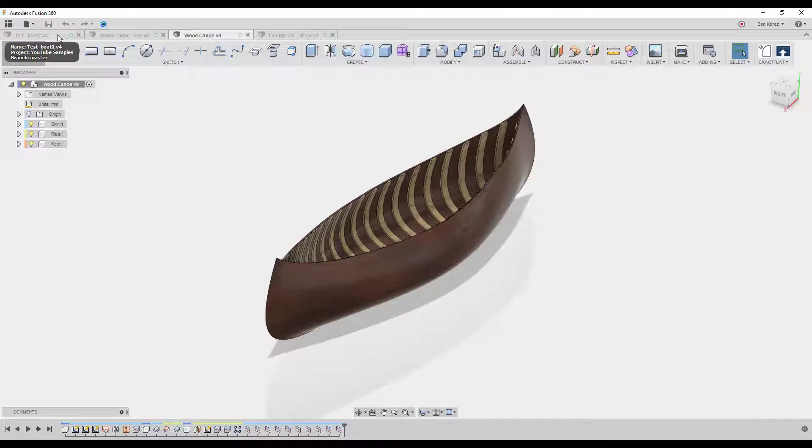So if we're starting now, just a second, I have an issue with my mouse here. It's kind of teasing me, so let's fix it.

Okay, so let's go into this wooden boat that I've created in the last two videos. The way I started, the beginning was okay. If we're talking about the sketching and everything, it was okay up till this point. Let's just see, let's find it. It was here. Up to this point, basically, it was okay.

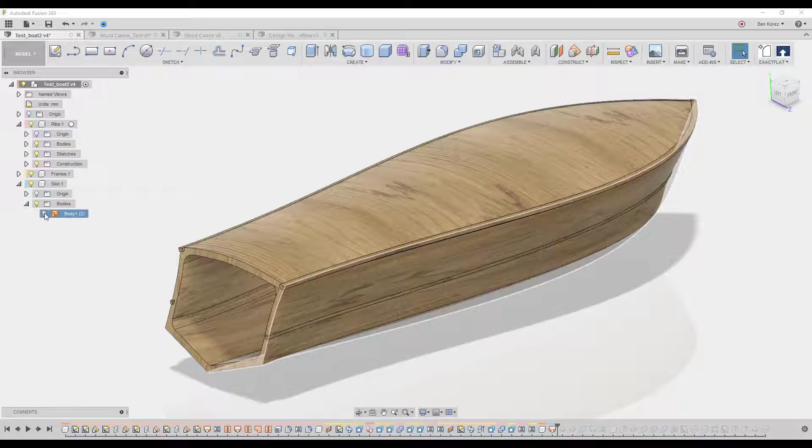But then I started working from the inside out. I started first working on the ribs, and then I moved to working on the skin area. And this is where things started to not work 100% as I wanted to. But I managed to fix it, and I also showed you exactly what to do and what not to do.

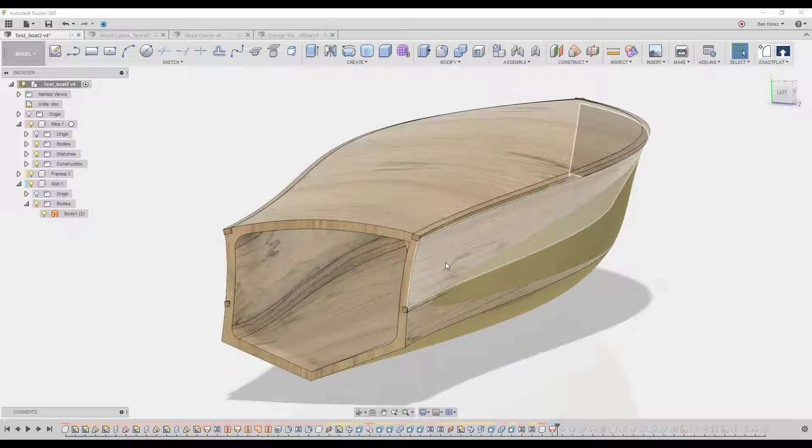As you can see here, I've basically finished the shape for the ribs, and then I took the impression from the ribs design, the shape. You can see I took the impression from here and the bottom. So I created this surface, and then I extruded.

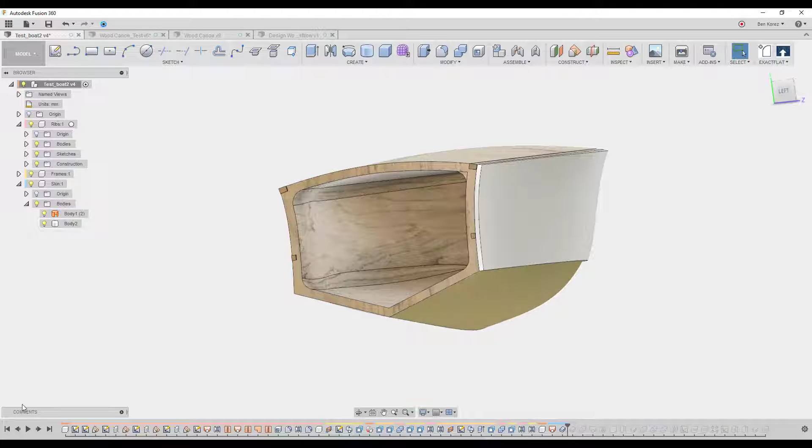This is basically the technique - I used the extrude tool, like the thicken tool, to thicken the surface outwards. The reason was because I couldn't thicken it inward because of the body of the ribs here.

But then I got this thing here. I couldn't extrude all the faces together outward, so I had to divide it - this face first, and then the second face. Again, some kind of limitation in the fusion part.

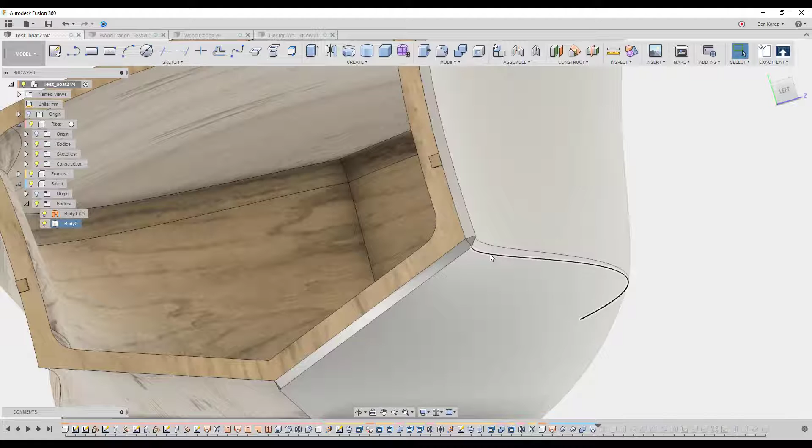When I tried to thicken everything together, the whole body here, the whole surface, it gave me an error. So I started thickening this one and thickening this one, and then I got this space here. So I created a new surface, and then I combined them together, and then I created a loft from the model - a loft between the two faces here, and that's how I filled the whole inside, this crack. And then I continued, and it worked just fine, but it's not perfect.

I was thinking about it days later, and I thought, okay, there must be something I can do better - something with the workflow or the technique. And then I realized two small changes that I can do, which are going to improve it - almost a huge difference it's going to make, both in the workflow and in the technique.

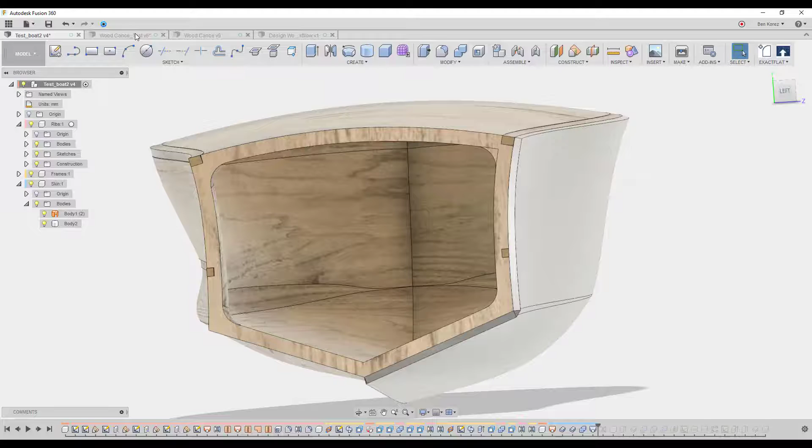Now I'm going to show you exactly what I mean, and you're going to also understand exactly what's the difference between the technique and workflow, and how and why they should work together in order to create a much better design experience. It's going to help you, first on performance in general, and second if you're going to need to edit the design later on along your development.

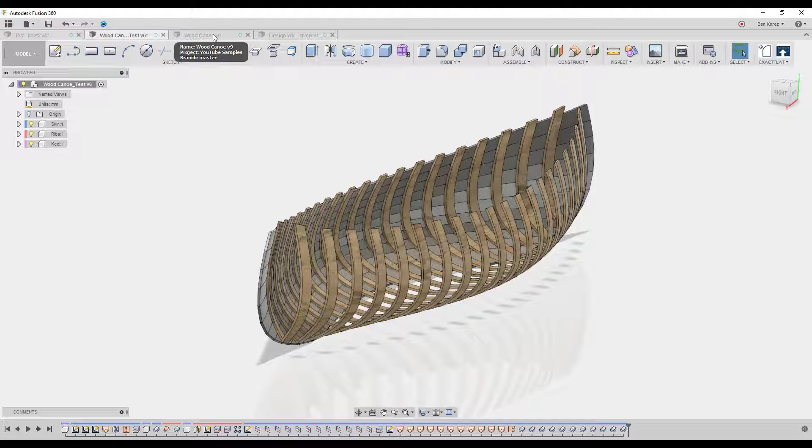So this is the result that we are going to get in the end. First I want you to check out the bottom here at the timeline. You can see how short it is. And second, look here at the browser, you can see basically the changes that I've made.

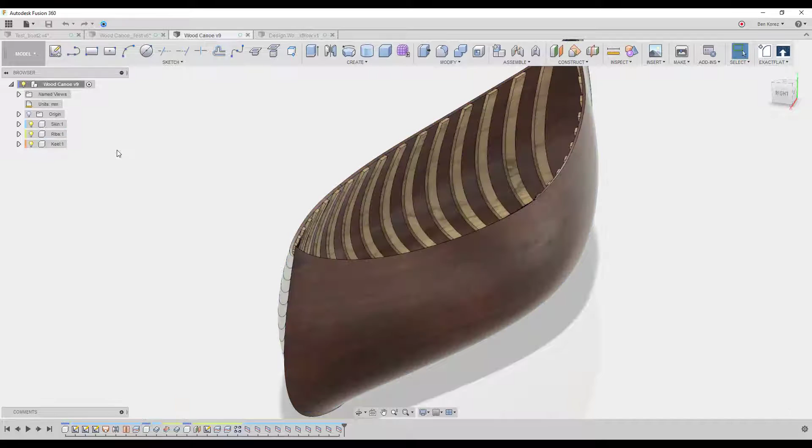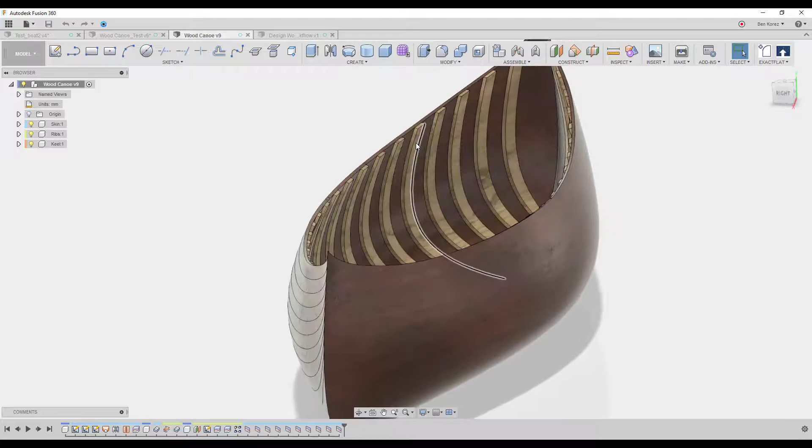I started first with the skin, then I moved to the ribs, and not the other way around. Why did I do this? Because to thicken the surface inward, I didn't have a problem. What I did afterwards, I took an impression of the surface from the inside of the skin, and I used it to create the ribs. Then again, I thickened the surface of the ribs inward, which makes much more sense, and I didn't have any problem with that.

So in general it makes a lot more sense, because when you're sketching the overall dimension of that object that you're going to build.

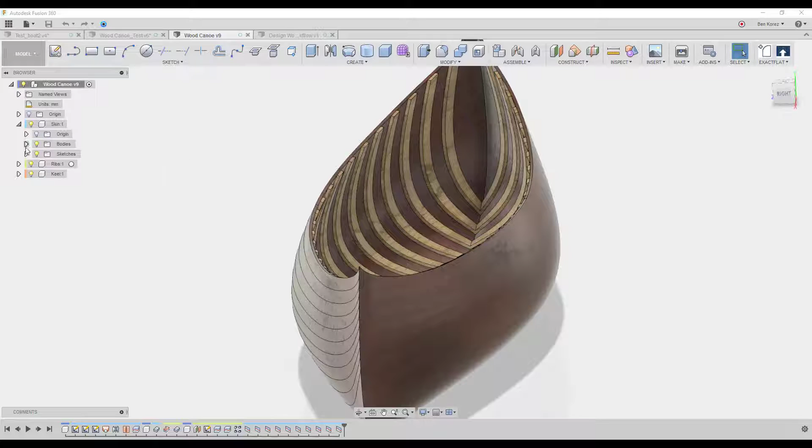Let's just say this is the canoe. I've created, I can show you here, it's the same sketching. I can go into the sketches and show dimensions. You can see these are the dimensions for the total overall shape, which means I cannot go outside, because if I thicken this sketch outwards, it's going to be bigger than what I actually planned. So I need to design it inward.

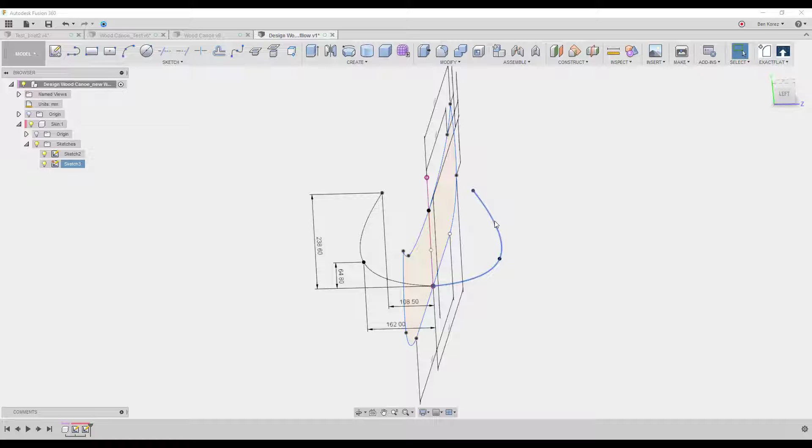So I'm starting this design from the outside in, and I'm going to show now exactly what I mean. So let's hide the dimensions here.

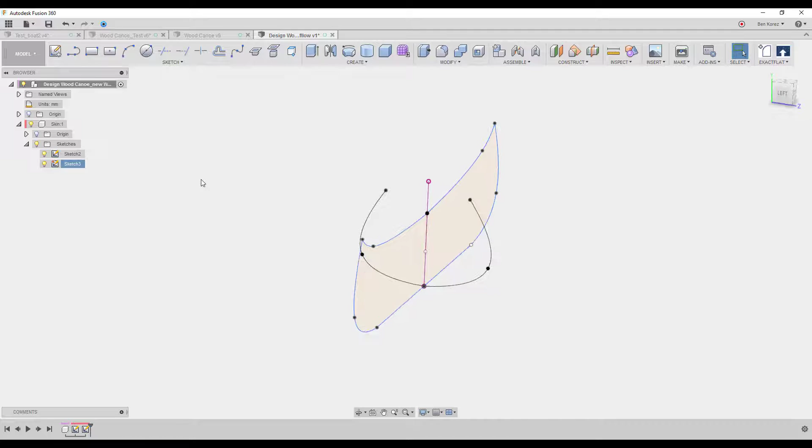Okay, so this is our design, this is the sketch. I don't need to create it from the beginning. I'm sure there are many kinds of design and so on, and you already know how to do it. If not, you can always go back to the other videos, it's the same technique, and learn how to do it.

Now at this point, I'm just going to go into the model environment, and I'm going to make sure that our skin component is activated. Remember, it's very important.

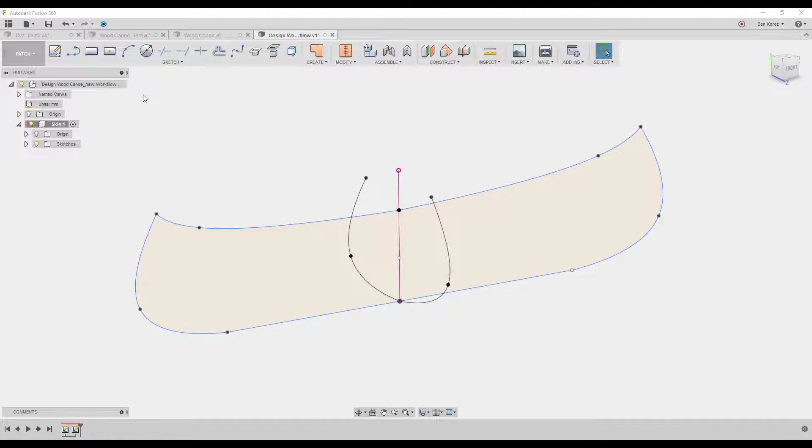Now we can go into the patch environment. I'm going to create a loft, I'll choose this profile here, move into this one, and use the bottom part here as the rail. And here we go, click OK. I'm just going to activate both of them again.

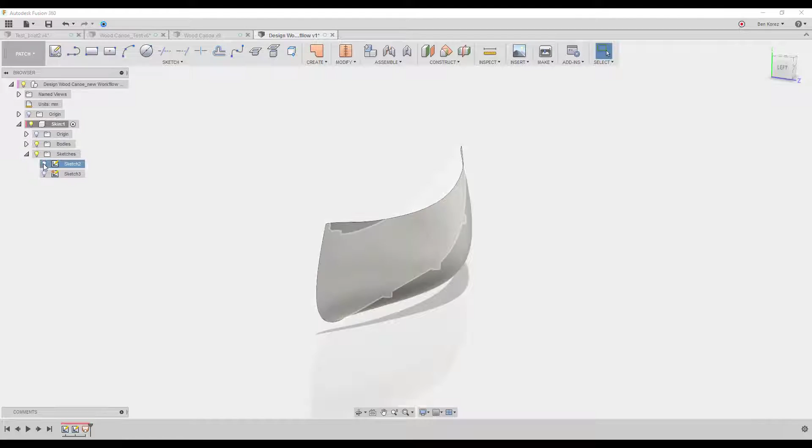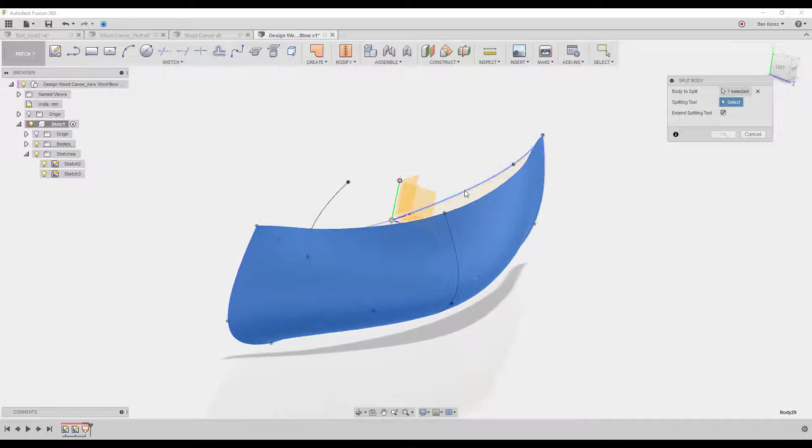Now at this point I can already do the cut. I'm going to use this profile here to cut the excess at the top in order to get the final shape. So I'm going to use split bodies. I'm going to use this body here and create select, select this one and this one, and then click OK.

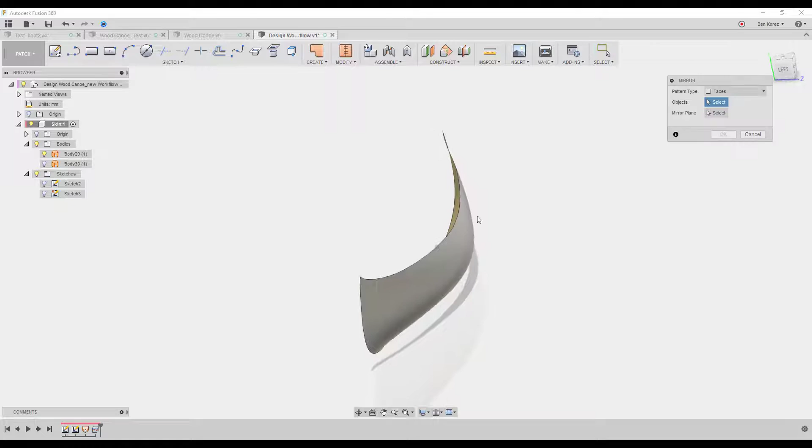So now you can see we got this excess here, which we can disregard. At this point we can go in and mirror. We can mirror this, I need to change it to a body, and then we can mirror it to the other side here, and we can also stitch it if you want. You don't have to, but we're going to stitch it together.

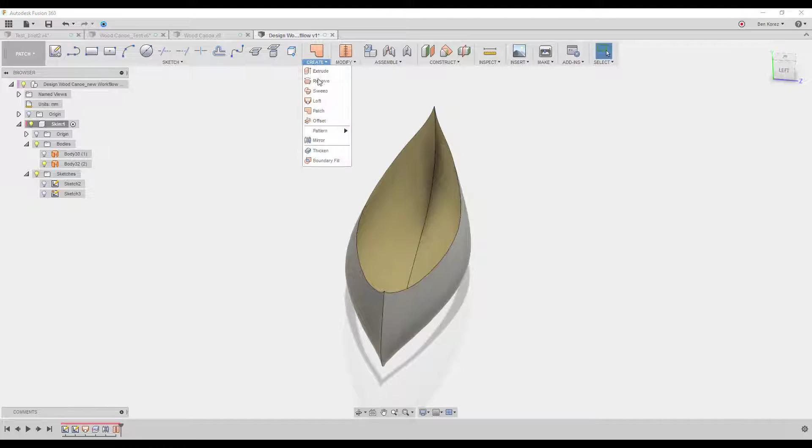Now next step, and this is the crucial one. Here you can see this is again where the workflow and the technique come together in harmony, you could also call it. So we're going to select this one and this face, and I'm going to give it, let's just say, 2 millimeters, okay?

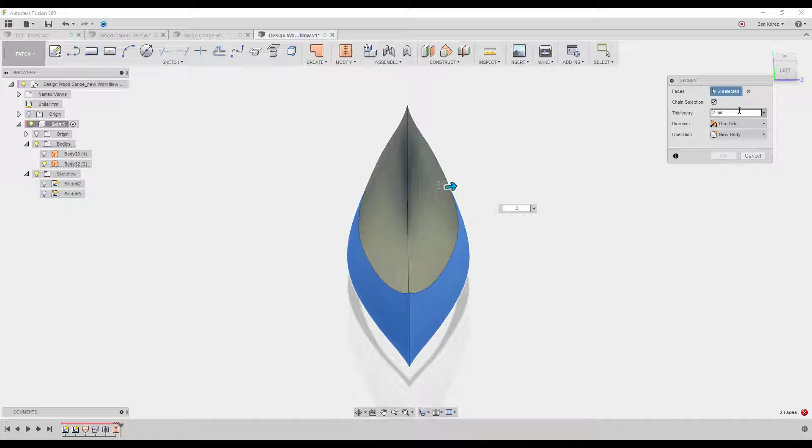And actually I should give it -2. It's going to give us an error now, it's not going to do what I want. Here you go, because I see that's the issue. You cannot really thicken those faces outward, some kind of limitation because of the shapes and so on. So we're going to thicken it inward, and you can see it worked beautifully, no issue whatsoever. And this is also what we want.

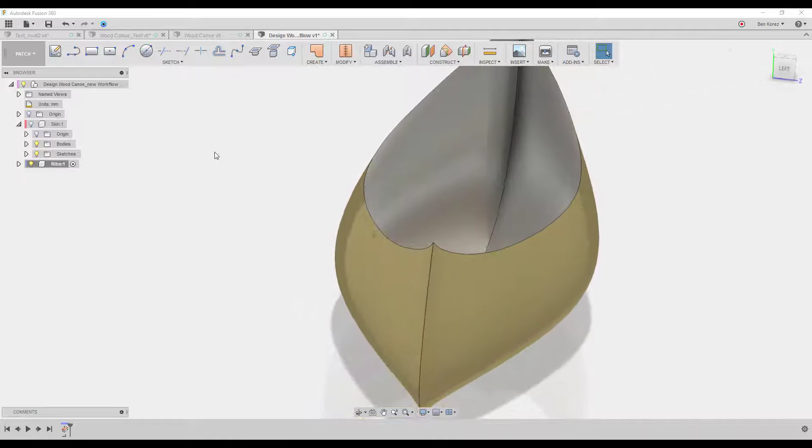Now the next step, I don't have to work on it anymore. The next step will be we're going to create a new component, and this component is going to be our ribs. In order to create them, we're going to create an offset of the face inside of the skin, okay? Hopefully it makes sense to you guys, so we can hide now the skin. And here we go, this is the surfaces or the faces that we're going to use in order to create the ribs.

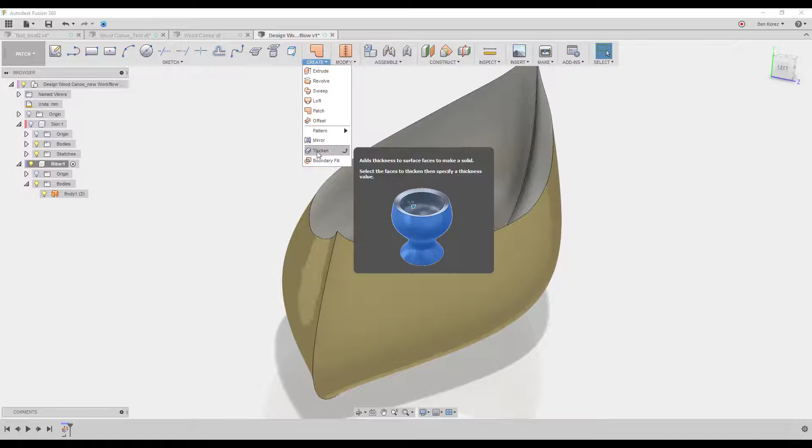You can see here everything works really smooth. Now we are basically having one body, which is good. And again, the same process, we're going to thicken this one here and this one here.

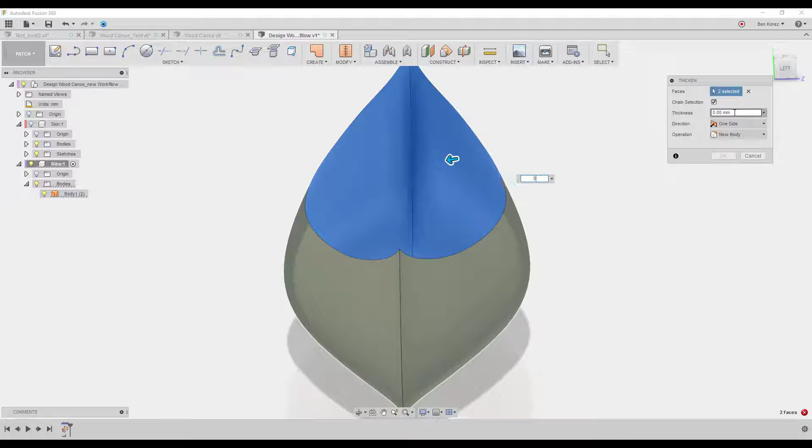And it shows us that it's going to thicken outward - oh sorry, here, this face - and now it's inward, which is good. Look at the arrow. So we're going to choose, I don't know how much you want to thicken it, maybe 5 millimeters. It's up to you, you can make it even more. Let's give it 10. Good, and we click OK.

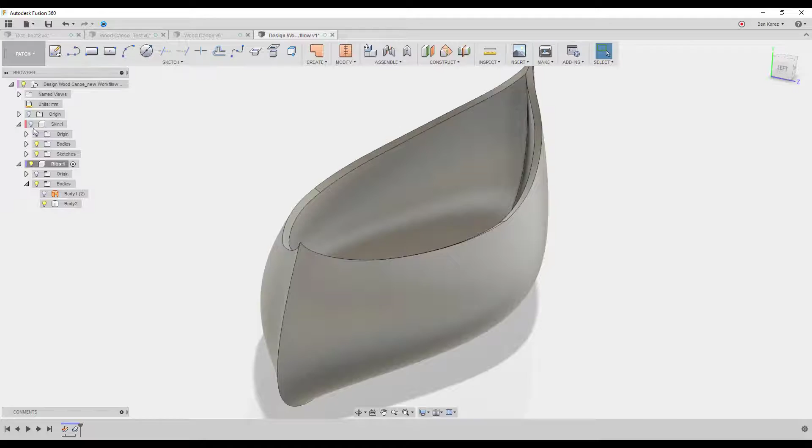And here you go. So this is the part, this is the body for the ribs, and this is the skin. If I go to inspect here, I'm going to change the components' colors so you can see the contrast, see how it looks. I'm going to go closer - okay, see, it fits perfectly.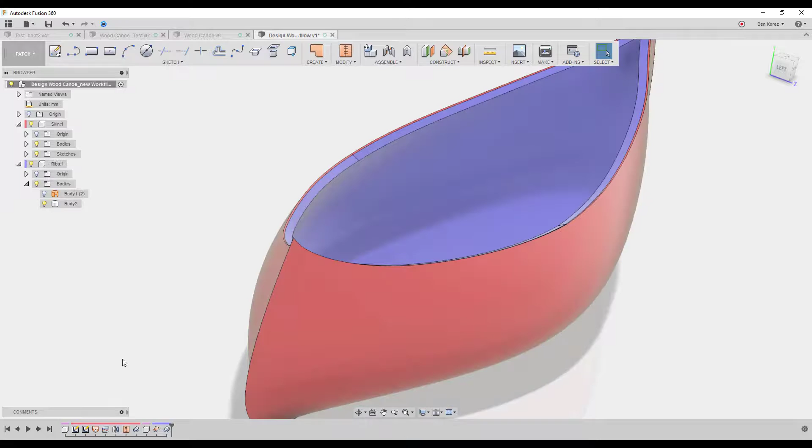And let's look overall at the timeline, and look at that. How beautiful. We're almost halfway through our design, almost.

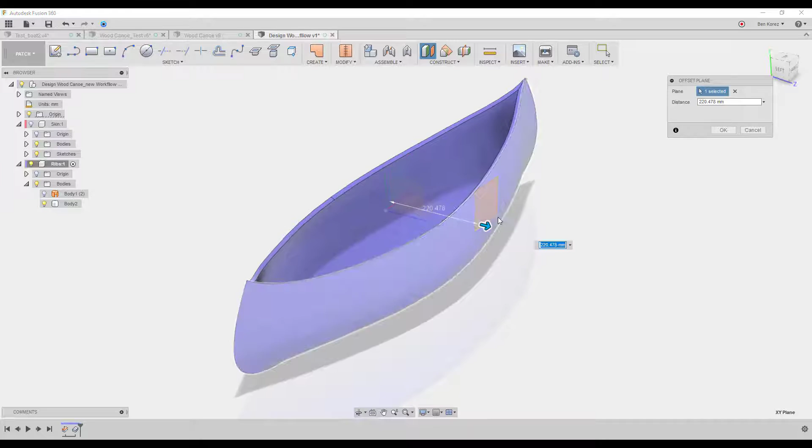From here, basically we can just continue exactly the way I showed you how to design the wooden boat - the process is exactly the same. We are going to, let me see here, create a construction plane here, going to be somewhere about here. It's okay, I'm going to create a sketch on this plane.

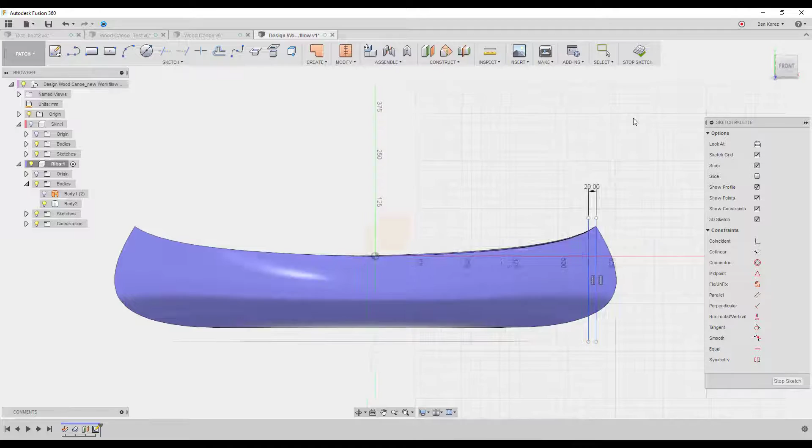We're going to create a line here. Our first one, let's just say somewhere here, click OK. Another one here, click OK. We're going to give it a dimension - it's going to be maybe 20, the width - and we click OK.

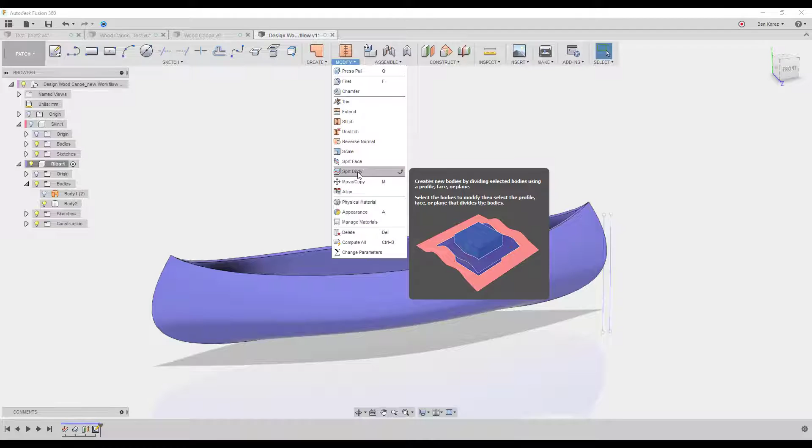And basically from here on, it's exactly the same process, the same workflow as the video that I showed you on how to design a wooden boat. So I'm not going to do everything, but I'm just going to do this part because I think it's really fun - it's really cool to do, and it's so easy and simple.

So we finish this one. We go inside here, we need to turn this one back on, and we're going to do exactly the same split body. We're going to choose this one now - the splitting tool is going to be this one - and now we got our first rib, which is this one here.

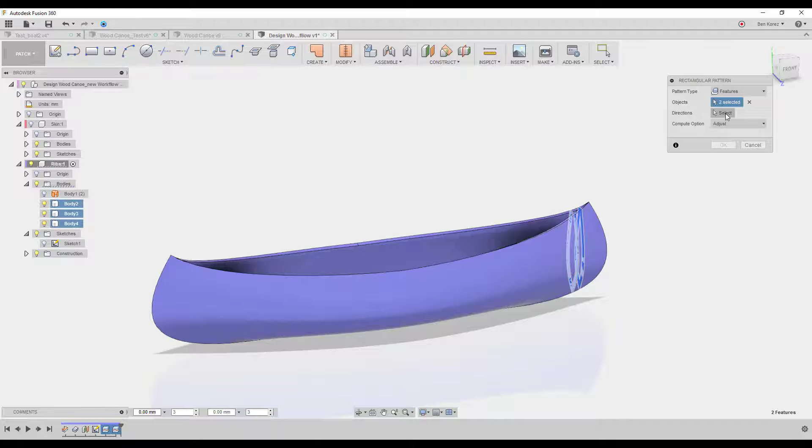And what we're going to do now is go to the pattern. We're going to create a rectangular pattern, and choose features. We're going to select this cut and this one, and the direction is going to be on the red, which is the X. So we'll choose how far you want it - let's change it, it's okay up to here. And how many pieces do you want? I'll just say 20, and you click OK.

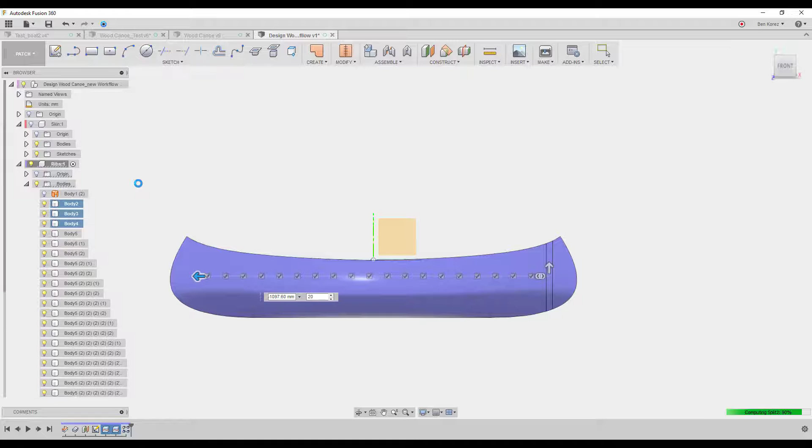And you can see the process is much faster. We don't have so many sketches and everything, and the workflow and the technique was also right, no issue with that. And here you go.

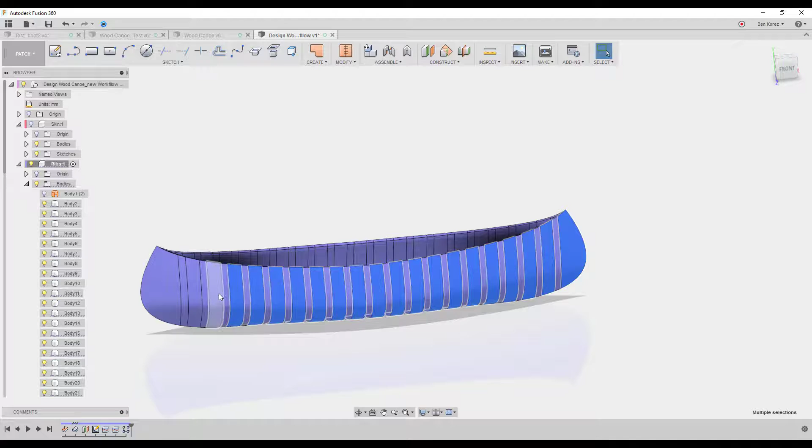Now from this point, you can just select them - you can select them from here, it'll be much easier. Those are the pieces that we don't need, and we're going to hit V on the keyboard, which is the shortcut for hide. And we can now show the skin - you can go back to the top, and here we go. This is it, you see how simple it was.

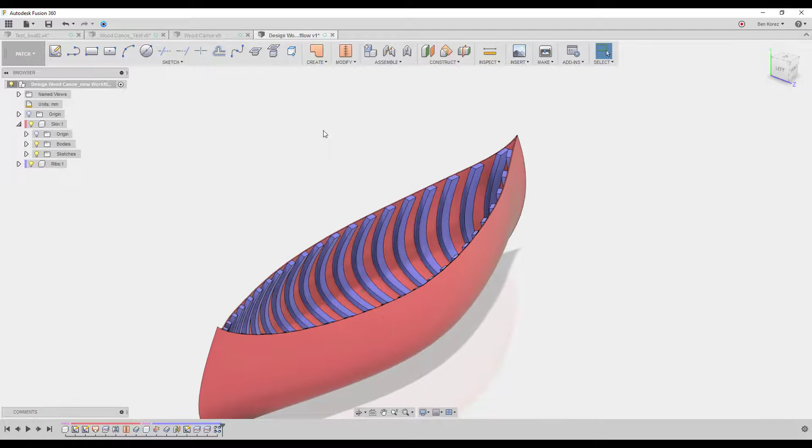So I've made a small change, and I saved myself the trouble of doing extra steps, an extra loft, in order to fix this. And it's going to be exactly the same.

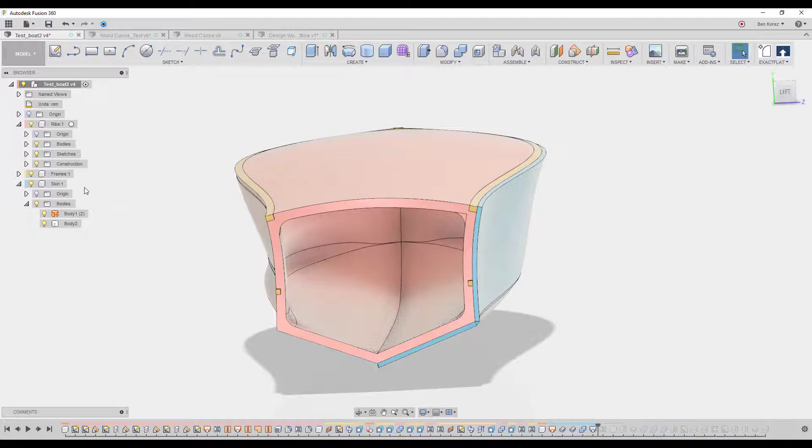So you're going to start if, for example, designing let's say a boat - but it doesn't matter, it can be anything else. For those of you who want to design boats and saw the 2 videos I created, the only thing you'll have to change is you'll have to start from the outside, from the skin, exactly the same step. You're going to thicken the faces inwards, then create a new component for the ribs, make an offset of the faces inward, and then continue from there.

Okay, so this was the example of why it is so important - what I wanted to show you here, the whole point of this video, is why the technique and the workflow are so important, and there's a good balance between them. It really doesn't matter what kind of design or object you're working on - if you have issues, really revisit your technique and the workflow.

And the reason is because Fusion, or SolidWorks, or whatever other software is out there, they have their own limitations in regards to the tools. They're giving us tools - now it's up to us, with some basic workflows, to figure out how we're going to use those tools.

This is where your creativity comes in. There are many people out there who have tried many things and give you all kinds of techniques and workflows which you can use. But it's very important to have the balance, the harmony between those two: how you're going to design it, what tools you're going to use, and the workflow, meaning the process. Where do you start? Which component? It's very important.

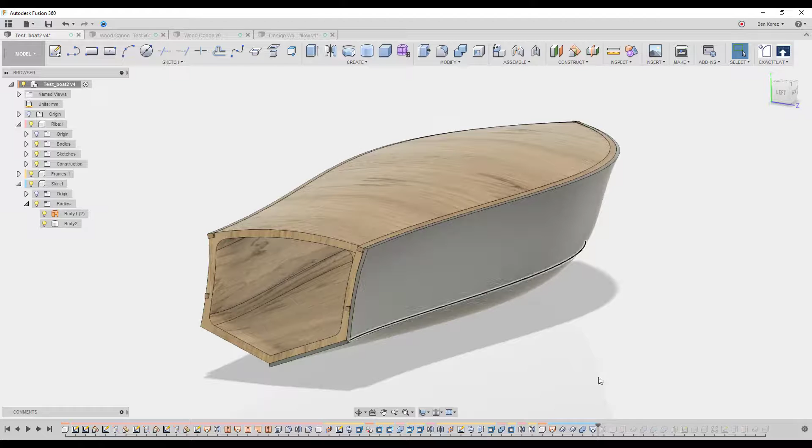So I did a very simple change here. I started from the outside design, and then thickened also to the inside. Now you understand the difference between the technique and the workflow, and why it's working much more flawlessly.

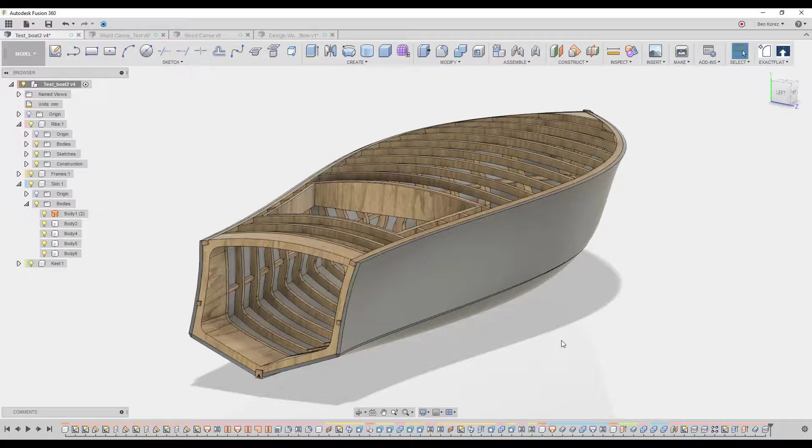So you see at this point, if I did it the same way as I did here, taking this boat as an example, in the timeline I would be somewhere in the middle. It would be much faster, much cleaner, much simpler also for the system.

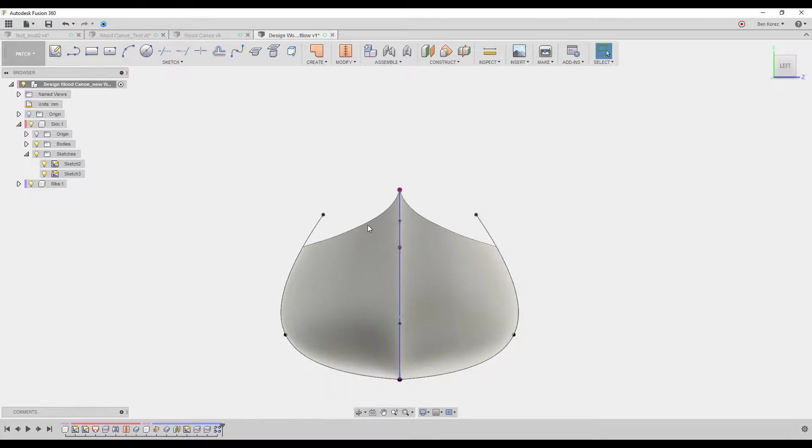It's going to be less heavy, fewer steps, so you can then go in and do all kinds of changes. For example, I can go into the original sketches and say, okay, this one is way too wide, so I go into the dimension and just flip it.

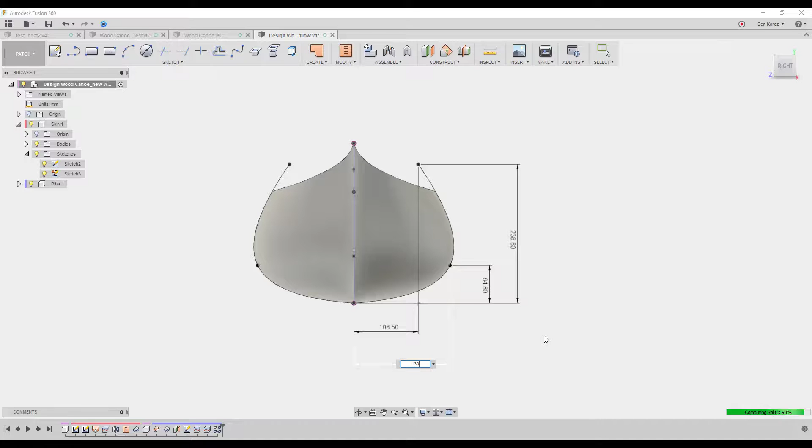I don't want it that wide, so it's this one here. I want to make it, I don't know, 130, and boom, almost done. My computer isn't that fast, and I'm also recording, but it's usually happening really fast. As you can see, no problem, no errors, nothing.

It's very easy to work like that when you have a good combination between the technique and the workflow. So watch it more than once if you haven't understood it yet, and I hope in the end you will understand it.

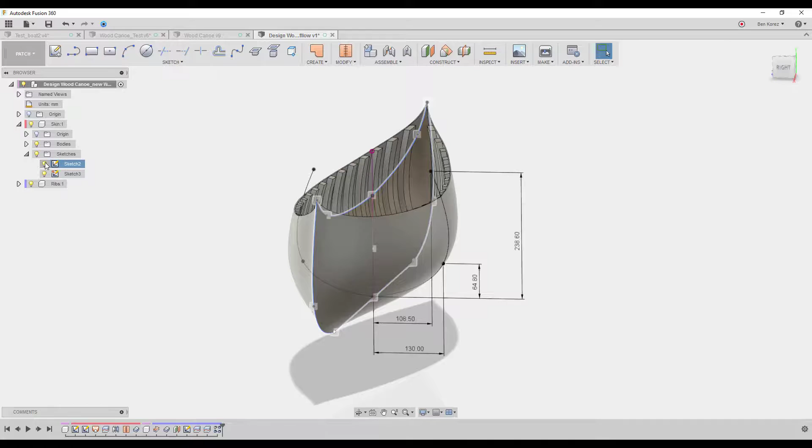Again, this isn't specific to designing boats or anything like that, it's for everything you're going to do. So think before you start designing, go through the process of where you're going to start, whether from the inside out or the outside in, which part and how you're going to design them, how you're going to use the different tools. The loft has its own limitations in certain situations, and the thicken tool also has its own limitations in certain situations.

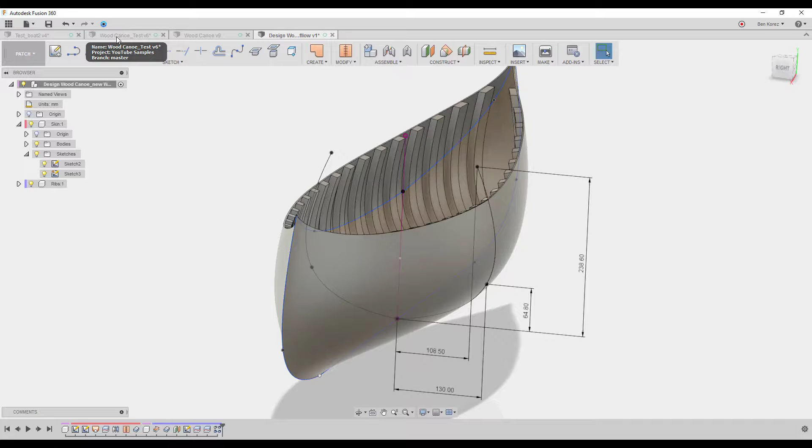So think about it before you're doing it, and don't get frustrated when you have errors. Just rethink - okay, maybe we should try it the other way around. That's exactly what I did, because I wasn't 100% happy with this one here, which is why I decided to rethink and figure out a better way.

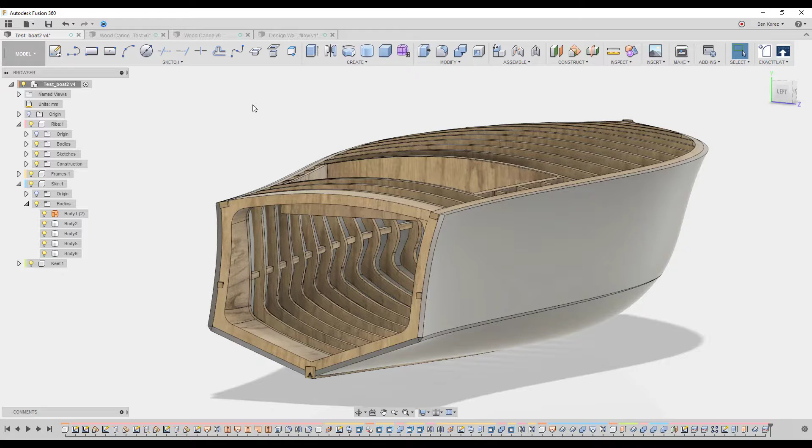That's why I decided to create this video, because I noticed that not many YouTubers or companies out there give enough attention to these two areas, the technique and the workflow. This is also my main reason for doing these videos - it's for you guys to learn about new techniques and also about the workflow.

I hope you like this video. I know you've been waiting for another one, about how to turn a 3D object into a 2D object, which you can then turn into a DXF file and send to your CNC machine. This video is coming next week - I'm working on it right now. There's a new plugin that works amazingly for that, and you're going to be really impressed. I look forward to finishing the video and showing it to you, so it's going to be maybe next weekend, something like that.

I can't promise exactly, I'm quite busy at the moment, so I'm doing everything I can to bring it out to you, because this is one of the last pieces I need to show you in regards to designing boats or anything else that you want to change from 3D into 2D, because you need to print it out.